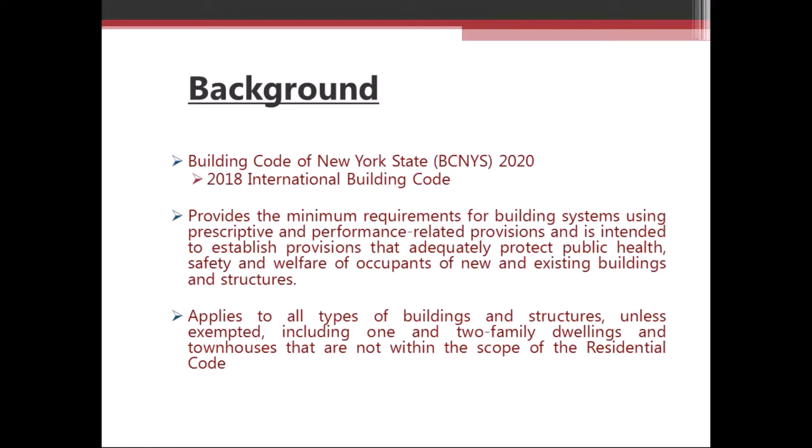So some of the exceptions to the building code, as I mentioned, are structures that fall within the residential code, and those are typically residential dwellings less than 3 stories in height. Agricultural buildings, consisting of barns, sheds, chicken houses, and other structures used solely for agricultural purposes. Temporary construction trailers, the trailers you would see on a typical construction site for the contractors and project managers.

Radio, television, communication, wind generation towers, and solar arrays. Although these structures are exempt, we do a lot of work on them. So the designer of these structures typically specifies certain tests and inspections to be performed for those structures. And then finally, children's camp sleeping quarters.

The documents that are required to be submitted with the building permit application include construction documents, typically the project plans and specs, statement of special inspections, the geotech report, as well as any other data submitted with the permit application. And in any event, the construction documents, the plans and specs, shall be prepared by the registered design professional.

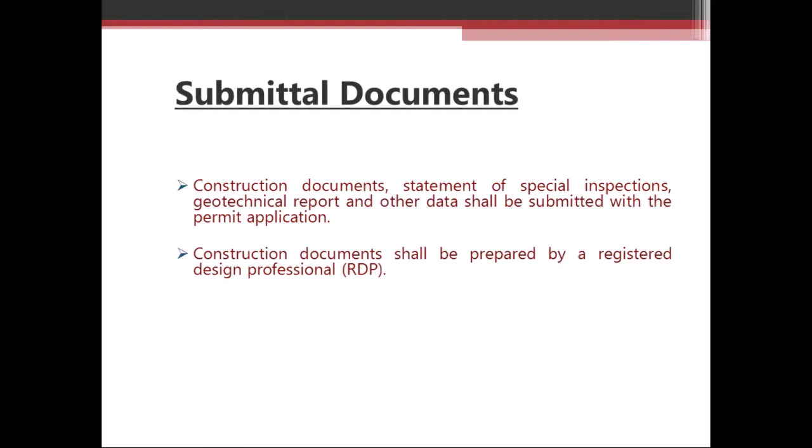So special inspections aren't anything new to the construction industry. Inspections were part of the first Uniform Building Code back in 1927. And in the early 60s, the term special inspection was introduced into the Uniform Code. But special inspection really came to the forefront in the early 80s after a walkway collapsed at a Hyatt in Kansas City, where 114 people lost their lives.

And after that collapse, a House subcommittee, chaired by Al Gore, investigated it, and recommended that comprehensive inspections should be performed for critical structural items during construction. So a special inspection is the monitoring of materials and workmanship of the contractor to ensure that the approved construction documents and codes are being followed.

Chapter 17 of the code is the pertinent chapter that has the procedures and criteria for inspections and testing. Chapter 17 also outlines the responsibilities of the owner, contractor, the design professionals, as well as the special inspectors. And the special inspection process is in addition to any structural observations, which will be required by the design professional.

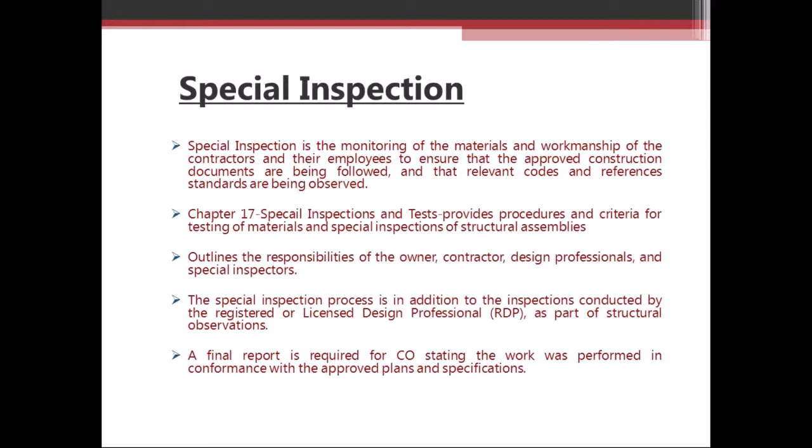And that brings us to question 1.

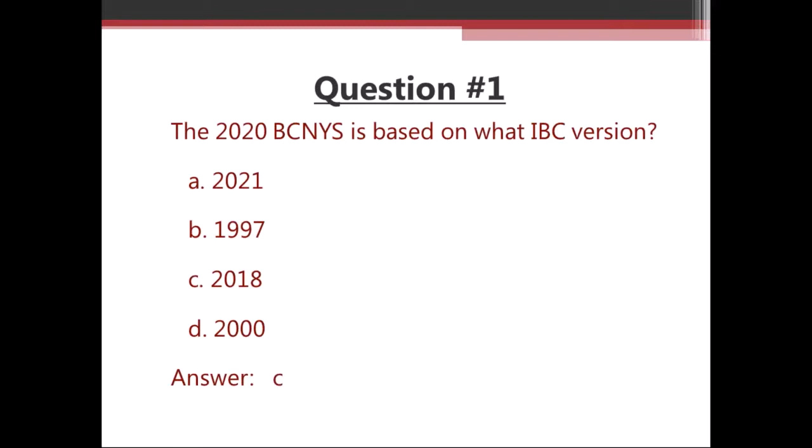So under approvals for Chapter 17, the agency should be approved by the building code official, and special inspections are conducted by an agency that is regularly engaged in conducting tests and providing inspection services.

So prior to construction, the approved agency needs to submit information to the building official that they are independent from the contractor, and they shall disclose any possible conflicts of interest to the codes enforcement official, as well as the design professional. They should also demonstrate they have adequate and calibrated equipment to perform the specified tests, and information or documentation that they have properly trained personnel to perform the inspections.

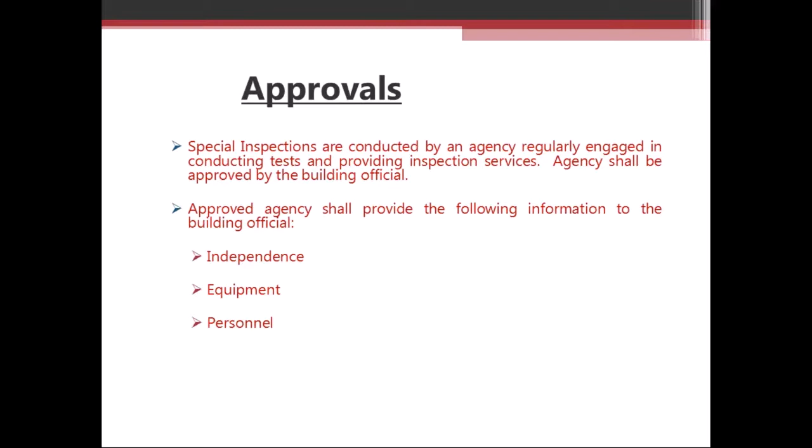Under reporting, the approved agency is going to keep records of the inspections and tests, which will indicate if the work was or was not performed in accordance with the approved construction documents. Any discrepancies need to be brought to the contractor's attention so they can correct it. This is probably one of the most important aspects of the reporting, to make sure discrepancies get fixed.

Before any future work covers up the discrepancy, so it can't be fixed or inspected later on. So it's always a good idea to have a pre-construction meeting to outline the process of reporting discrepancies, to make sure the inspectors have the right contact on the site for the contractor.

It's not the inspector's responsibility to accept or reject any work that's not in conformance. An example of this is concrete. If concrete's delivered to the site and it doesn't meet the specification for slump or air, the inspector needs to tell the contractor, and then the contractor needs to decide if they're going to reject the truck, try to fix that, or incorporate that deficiency into the work, and then hopefully try to get that discrepancy cleared up later on with the RDP.

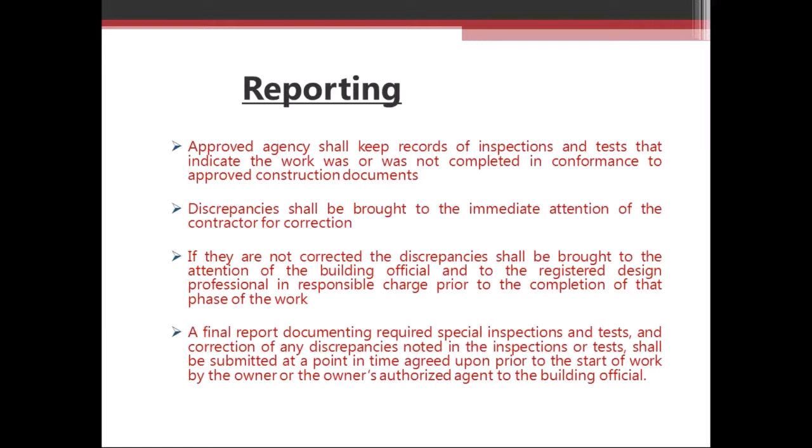If discrepancies aren't corrected, then they need to be brought to the attention of the building official, as well as the registered design professional. And the reports documenting the inspections and tests need to be submitted regularly to the owner or the authorized owner's agent, as well as the building official.

A statement of special inspections prepared by the RDP or a qualified person approved by the building official should be submitted with the permit application. That's going to list the materials, any of the systems, components, or work which is going to require testing and inspection. It's also going to list the type and extent of each test and inspection.

If the structure is designed to resist seismic and wind forces, any of those additional inspections, as well as the frequency of inspections.

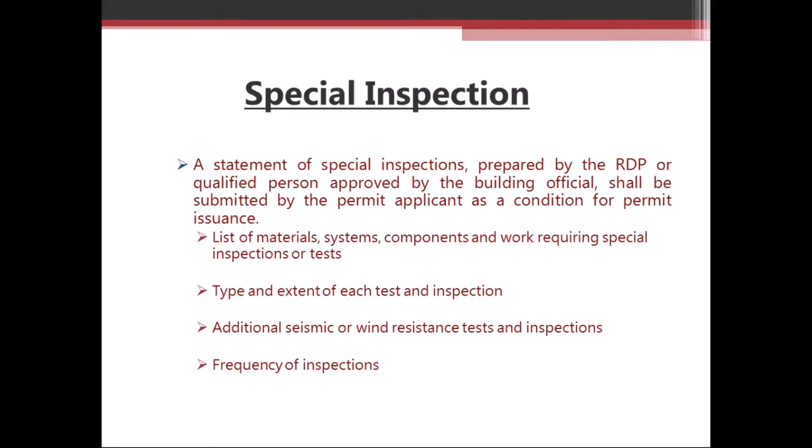The building code breaks down the frequencies into two categories. The first is continuous, where special inspection by the special inspector, who is present continuously when and where the work is being performed. An example of this would be if the contractor's backfilling a foundation wall that's 12 feet high, and specifications require the fill to be placed in 12-inch lifts and compacted to 95% all the way up. The inspector's pretty much got to be there full time to verify that the work is in compliance.

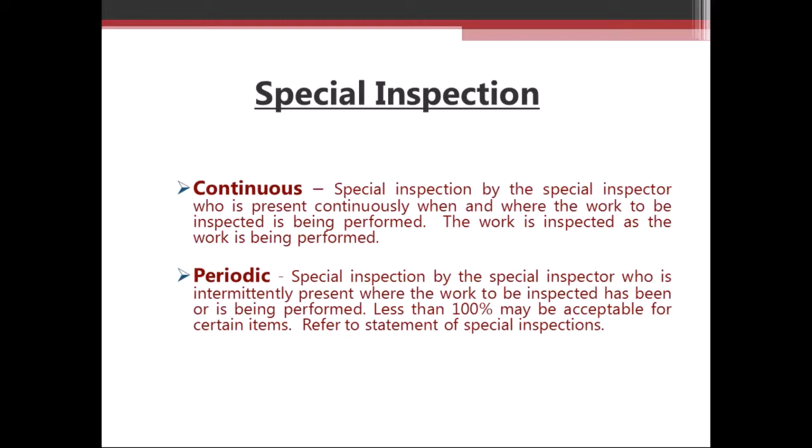Periodic inspection, that's special inspection by the inspector who is intermittently present where the work is being performed. In some cases, less than 100% may be acceptable. An example of this would be reinforcing steel in a long foundation wall. It may take the contractor a week to erect that reinforcing steel. However, the inspector can get there sometime just prior to concrete placement to verify whether or not it's in compliance. So the inspector doesn't need to be there full time when the contractor's erecting the reinforcing steel.

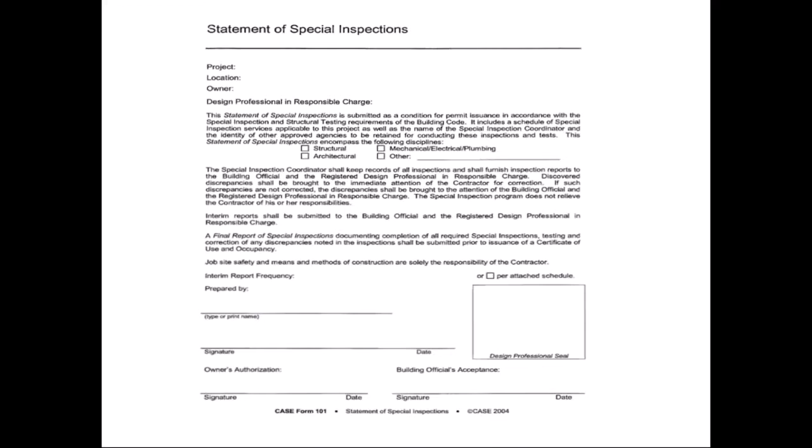So this is a CASE document, statement of special inspections. A lot of RDPs use this, and along with that, there's typically a schedule. So the RDP can just check off what items are going to require testing and inspection on a project, and it's going to list the inspection firm with their contact information. One thing I want to note at the bottom, it does state the inspectors and testing agencies shall be engaged by the owner. That way there's not a conflict of interest.

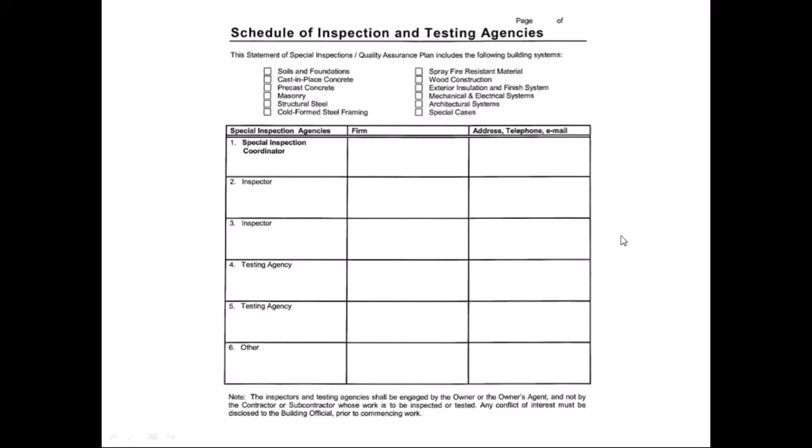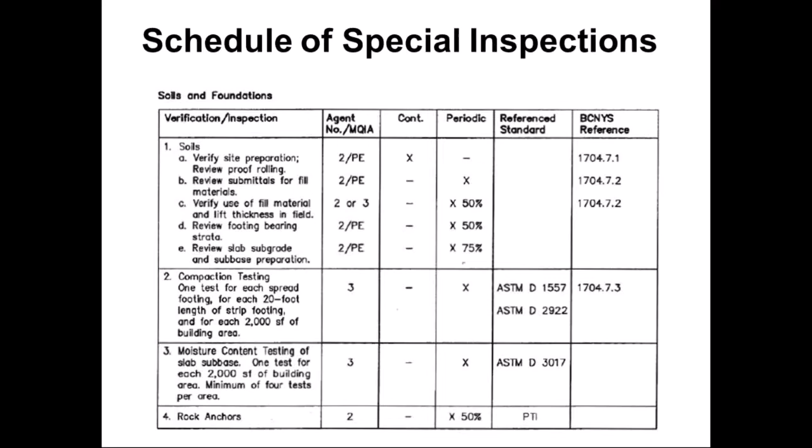And then number 3 is the testing agency. On some projects, the inspector and testing agency are the same firm, which in most cases should save the contractor or the owner money. They've also identified what inspection items are going to be continuous and which are going to be periodic, and identified the percentage level for periodic inspections. The other thing they do, which is kind of nice, is they put in what the reference standard is for the inspection items. And that brings us to question 2.

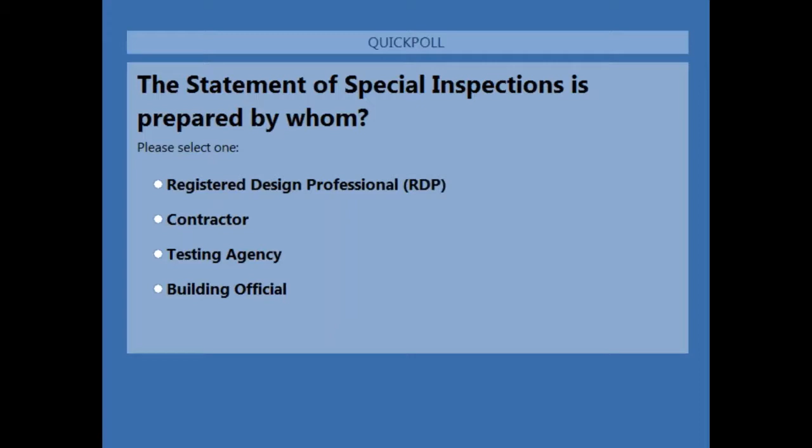Please continue, Brian. Okay, question 2. The statement of special inspections is prepared by who? Answer is A, the registered design professional.

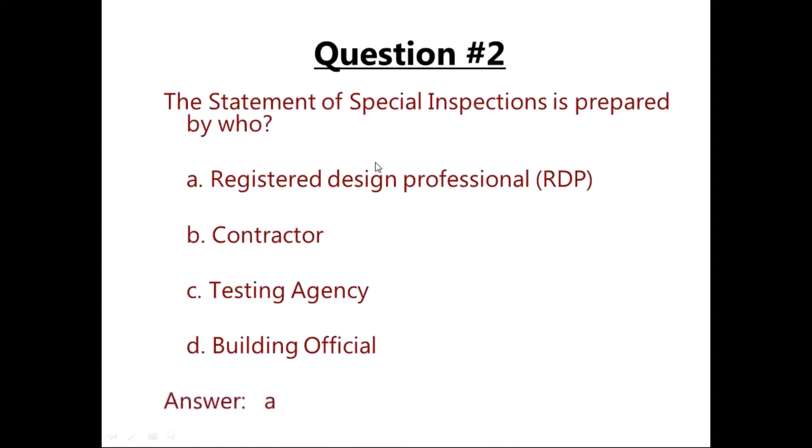Moving on to some of the special inspection and test exemptions or exceptions. One of the exceptions is any work that is minor in nature, as warranted and approved by the building official. Unfortunately, there is no definition for minor in nature, so that's really up to the building official.

One of the other exceptions is for Group U occupancies that are accessory to a residential occupancy, and for lightweight structures. One of the new things to the code, or at least the language, is the contractor is permitted to employ the approved agency, where the contractor is also the owner of the project.

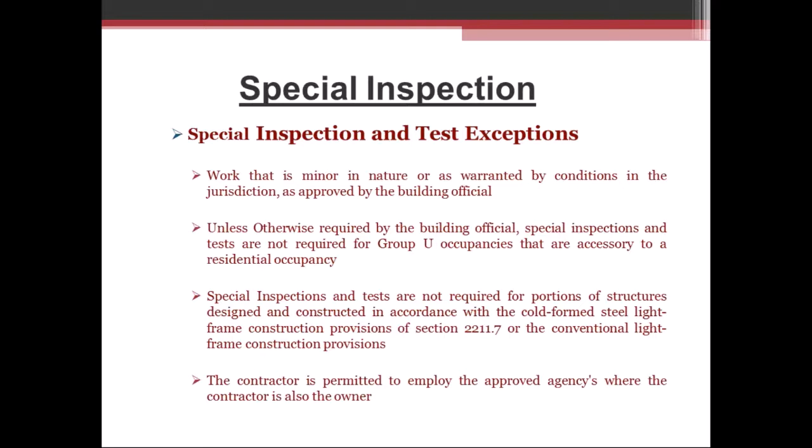So to get into some of the roles of the different parties involved with the special inspection process, the building code official has legal authority over the project and will issue a stop work order for any non-conformance items. They review the submitted plans and specs for compliance with the building code, and they approve the special inspection program as well as the agency and the inspectors.

They're going to monitor the special inspection activities during construction, review special inspection reports, and then perform a final inspection, which typically happens after the final special inspection report is issued. They can also require inspections for other work they feel may be necessary for the project.

The role of the special inspector: they verify that the work and materials used in construction conform with the construction documents, and notify the contractor of any non-conformance issues so those can be fixed or resolved with the RDP. Unfortunately, the special inspector can't issue stop work orders—only the building code official can do that.

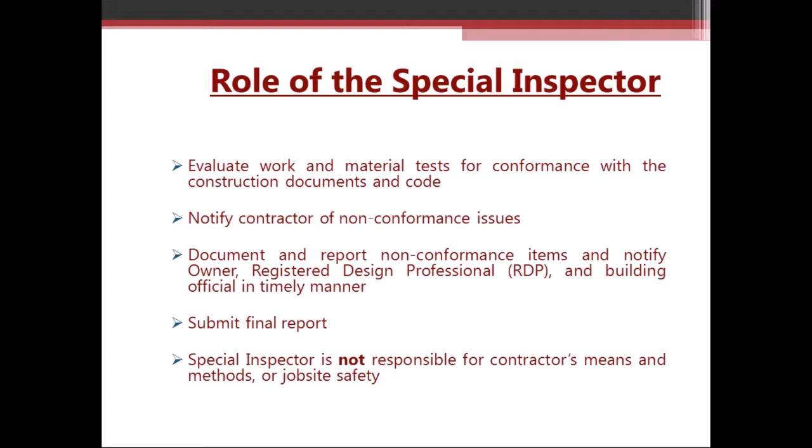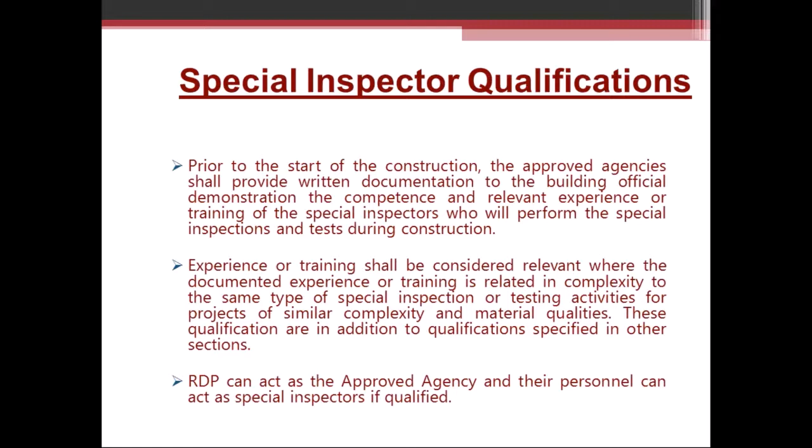Qualifications of the inspectors: prior to construction, the approved agency shall submit written documentation demonstrating the competence and experience of the inspectors who will be performing the tests and inspections. The RDP can act as the approved agency, and their personnel can act as a special inspector if they're qualified and experienced in the type of work they are inspecting.

The role of the owner: the owner is going to employ the approved agency as well as the special inspectors, so there's not a conflict of interest. They also maintain the statement and seek approval from the building official if there are any changes required as the project progresses.

The RDP prepares the special inspection program and determines what items are going to require special inspection. As the designer of the project, they are best suited to prepare the program, since they're the most familiar with the aspects of the project.

They're going to respond to any field discrepancies if they're contracted to do so. It's not uncommon to have a discrepancy where the contractor can't construct a portion of the work in accordance with the approved documents. In a case like that, it's marked as a discrepancy, and it's typically addressed between the RDP and the contractor to come up with a solution.

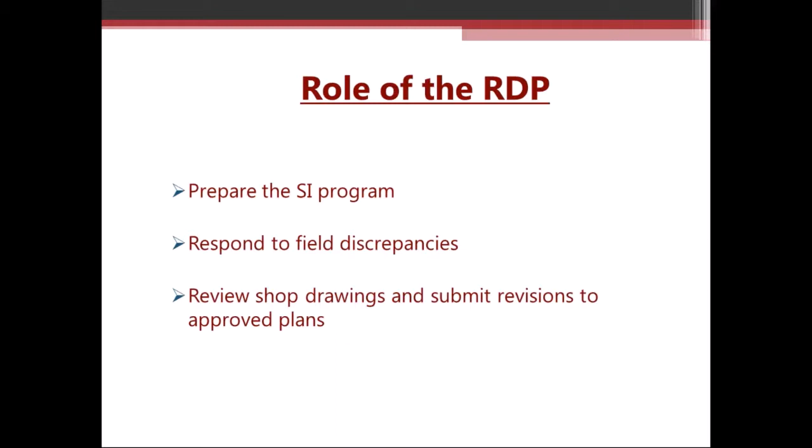The role of the contractor is to notify the special inspector that work is ready for inspection. It's important they provide sufficient notice so the inspection agency can coordinate their staff and equipment. The last thing we want to have happen is have the inspector out there at the time of concrete placement, because if there are any discrepancies with the formwork or the rebar, that's going to put the concrete placement off.

They should provide access to the approved construction documents in cases where any changes have been made to the specifications or drawings. We have had instances where inspectors identified discrepancies, brought that to the contractor, and then found out later there was a change to the drawing that didn't get down to the inspection agency.

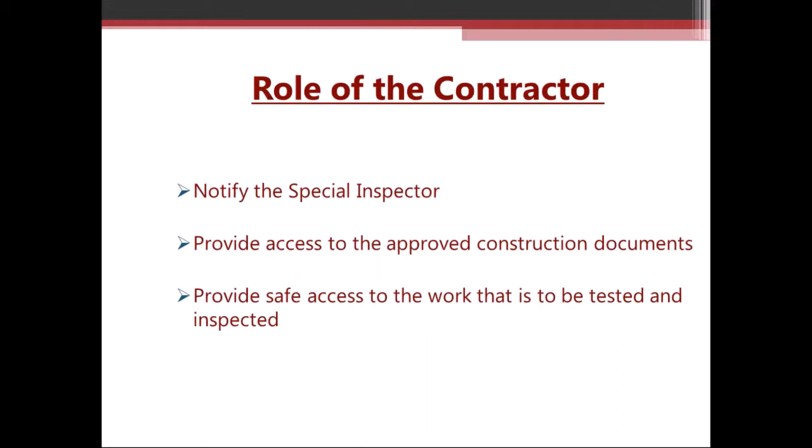And then lastly, they need to provide safe access to the work that is being tested and inspected. So they may have to provide lifts or shoring for subsurface work to be inspected.

So some of the special inspection items in the code, we're going to go through these in more detail, but soils, which applies to shallow foundations and fill materials. Deep foundations, which can be driven, cast in place, helical piles. Concrete construction, masonry construction, structural steel, sprayed fire resistant materials, and then mastic and intumescent fire coatings.

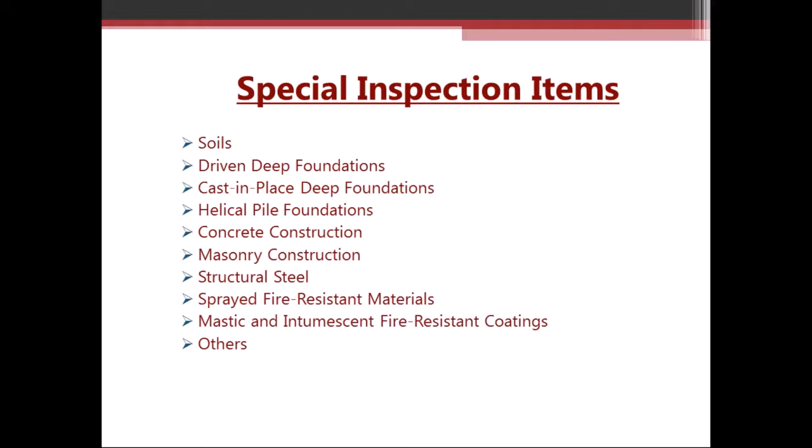There are other special inspection items identified in the code, such as wood and EIFS. However, this list is the typical items that we see on projects in our area. So for soils, the special inspector is going to determine general compliance with the approved soils report and documents prepared by the RDP during site preparation.

So prior to construction, a geotechnical report should be prepared that's specific to the soil and groundwater conditions at the project site. And from that, the structural and civil engineers will use that information to prepare their specs and drawings. And in a lot of cases, they will just specify on the drawings to prepare the site in accordance with the geotech report.

So the second item, the inspector is going to verify the shallow foundation subgrade is suitable to achieve the design bearing capacity, which is basically going to involve comparing the site observations at the time of the excavation work to the conditions that were identified in the geotechnical report to make sure they're consistent.

The inspector is going to verify excavations extend to the proper depth and material, which is typically going to be dictated by the frost depth. The frost depth in northern New York is typically 5 feet below grade, whereas in the southern part of New York, typically the foundations are placed 4 foot below grade for frost protection.

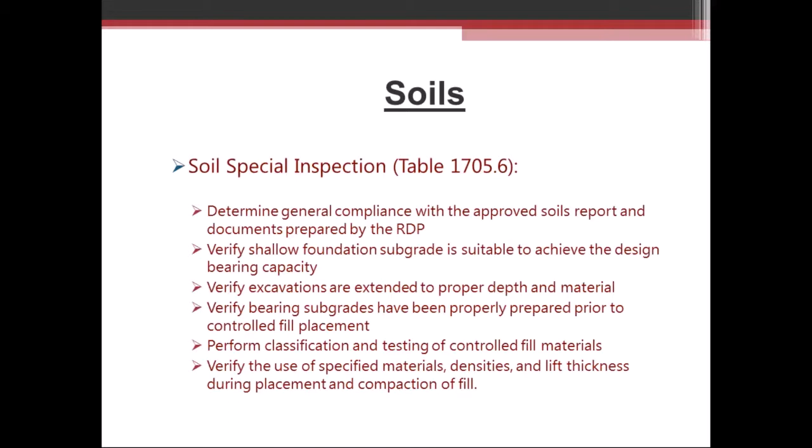So I'm just going to run through some examples here, some example photos. So the photo on the left, this is a foundation excavation, and I think this is in central New York. So the frost depth is 4.5 feet. So the contractor excavated to the proper depth, 4.5 feet. However, you can see in the photo there's standing water and mud.

And per pretty much all geotechnical reports and building codes, mud and standing water has zero bearing capacity. So this would be a discrepancy. So the inspector would review the project plans, specs, the geotech report, and typically there will be information in those documents on how to remediate this situation. If there isn't information in there, then typically the inspector will go back to the registered design professional to get guidance on how to resolve this discrepancy.

So for a typical situation like this, it's usually specified that the contractor over-excavate maybe 6 inches or to stable material, and bring in compacted fill, as well as employ some dewatering measures to get rid of the standing water. The other thing is it's very hard to place rebar in mud. The rebar gets dragged through mud and that contaminates the rebar, and also for chair support to keep the rebar up in the right spot, it's difficult to hold the rebar position when you have standing water and mud.

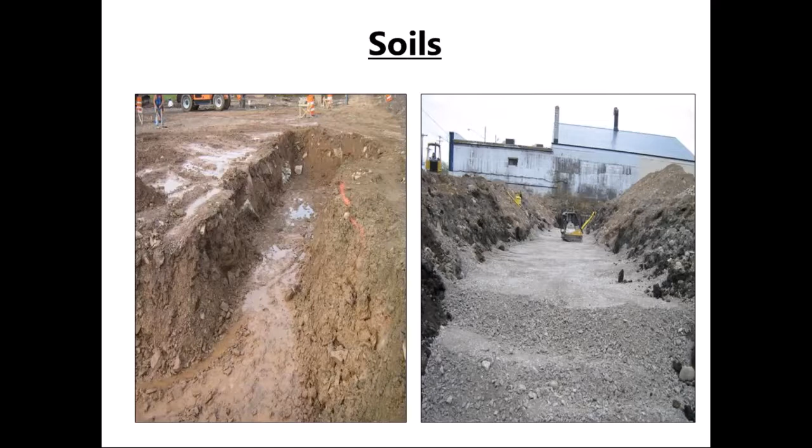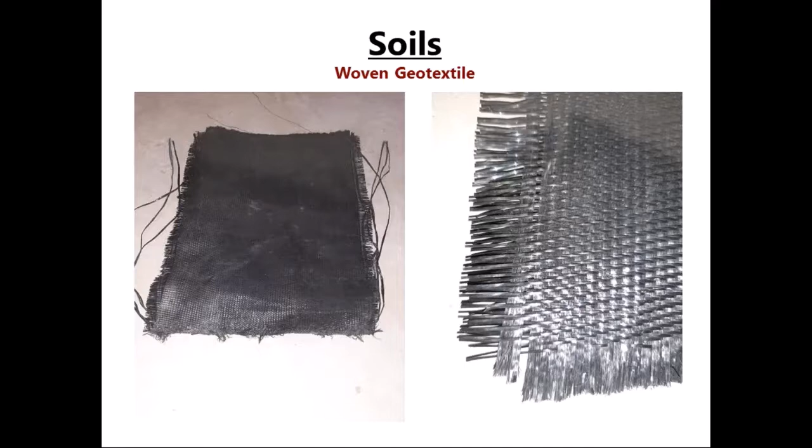Versus the non-woven geotextiles, these are needle punched polyester or polypropylene fibers. And these fabrics aren't as strong as the woven fabrics, but they do allow water to pass through them. So they're typically used for separation and for drainage applications, such as used for a foundation drain around a footing.

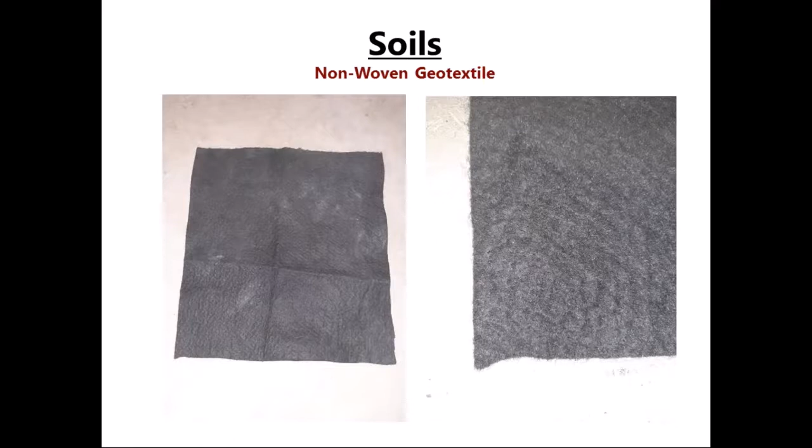There's sometimes confusion between the New York State DOT number 2 stone and the DOT type 2 subbase materials. So I've got a couple of photos here. The photo on the left, this is a DOT number 2 stone, and you can see it's an open graded stone. It's very, very good for drainage. It's typically used for drainage purposes. It's also used as a concrete aggregate for concrete mixtures.

But one of the things with this is in the field, because it is such a coarse material, it's not possible to do the typical field compaction testing on this material to verify it's compact. But because it is open graded, typically the specification is to compact it 4 to 6 times with a certain size compactor.

The photo on the right, this is a type 2 subbase, and this is a material you typically see below a slab or below a pavement. And it's a well-graded processed material. And because of the fine content in it, it can be tested in the field for compaction in accordance with the typical project specifications.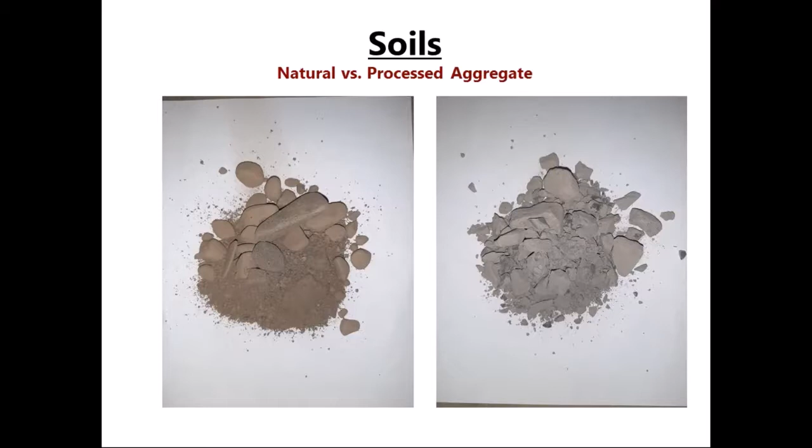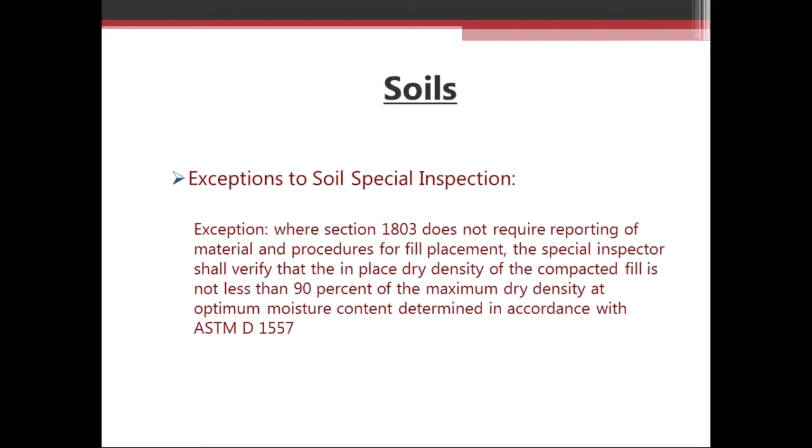There is one exception to a soil special inspection, and that is fill placement where there's no fill greater than 12 inches across the site. It doesn't need special inspection. However, it does require compaction to 90% of a modified Proctor in accordance with ASTM D1557. And that brings us to question 3.

Please continue, Brian. Okay, question 3. The special inspector can issue a stop work order on a project. True or false? Answer is B, false. The building code official is the one that issues stop work orders.

So moving on to driven deep foundations. These are typically going to be steel H piles, steel pipe piles, or timber piles that are driven with a large impact hammer to support structures over poor soil conditions. So in the field, the inspector is going to verify the pile material, the pile size and pile length.

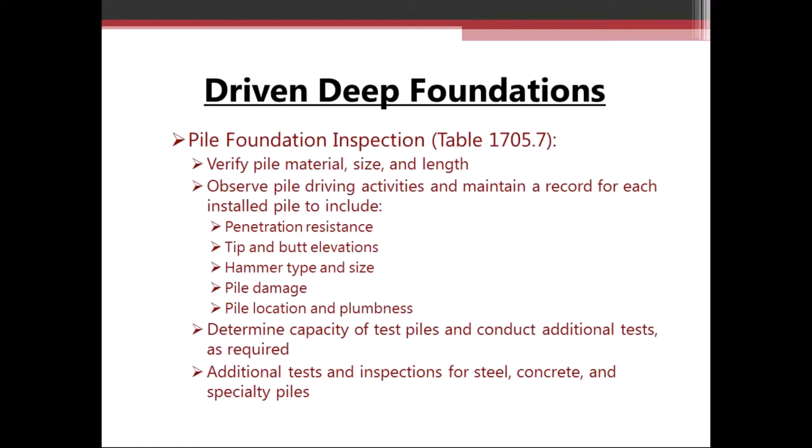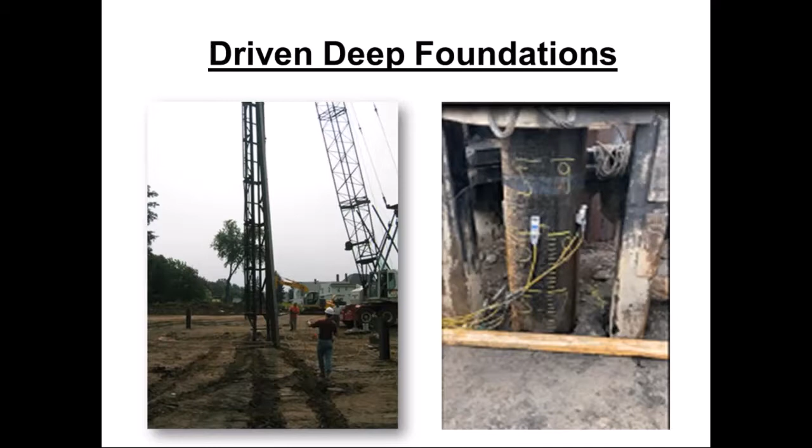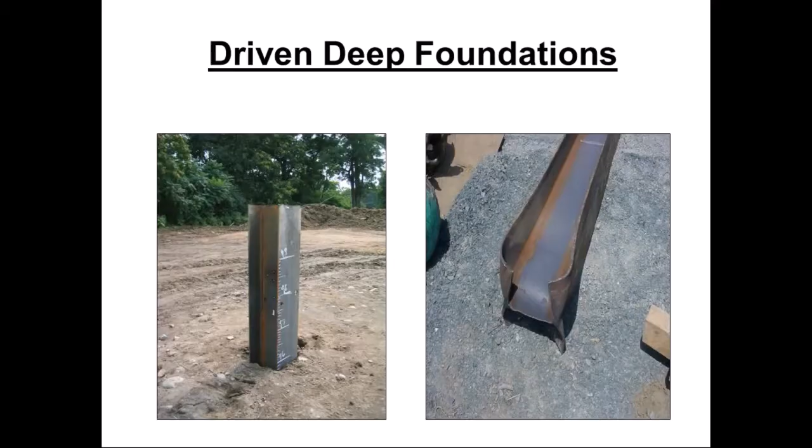Cast in place deep foundations. These typically consist of drilled concrete piers, micro piles, or auger cast piles. And with these, the inspector is going to monitor the drilling activities and maintain a record for each one. Verify the location, the plumbness, verify the diameter of the piles, the length.

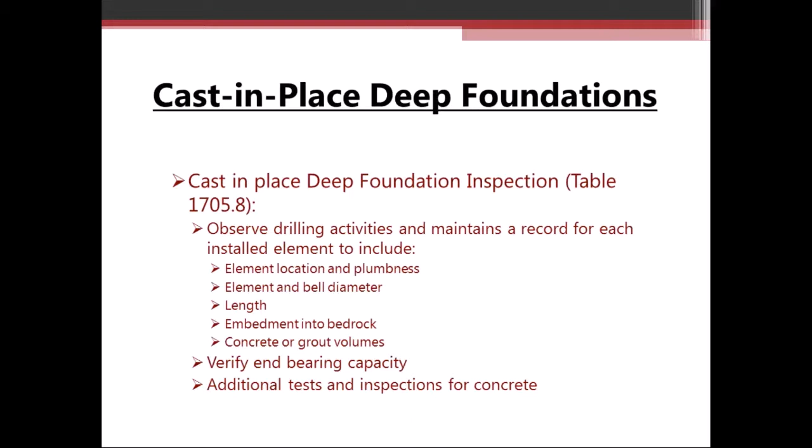Typically, especially with the drilled piers and the micro piles, they're going to be embedded into bedrock. So the inspector is going to verify that the design embedment into the bedrock is achieved through visual observation on site, as well as the information from boring logs contained in the geotechnical report. And then they're going to also monitor the concrete and grout volumes that go into those deep foundation elements. And then there is some additional testing as far as concrete or grout, whichever is used to cast the units.

So with the cast in place elements, there's typically an auger or some sort of casing and drill bit that will create a void down to a certain depth. And then that void is going to be filled with concrete or grout material. And then sometimes for the larger drilled piers, there may be some rebar cages that are placed that will require some reinforcing steel inspection.

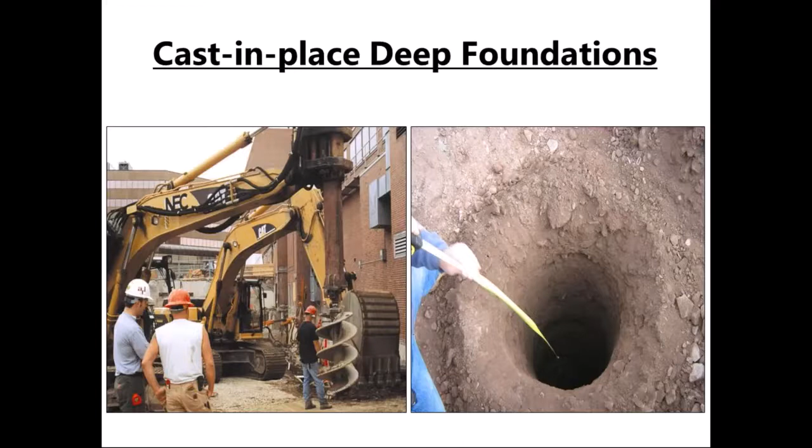Helical piles, these are small diameter, either square or round shaft piles, which have plates that are screwed into the soil to support structures through softer, poor soil conditions. So the inspector is going to monitor the installation activities, verify the installation equipment that's on site is specified and approved, monitor the pile dimensions, the top and bottom elevations, as well as the final installation torque. And with the helical piles, bearing capacity of the piles is related to the installation torque.

A couple ways the inspector can do that. There are torque gauges with the equipment that the inspector can visually look at, or sometimes there's shear bolts that shear off when a certain torque is met. So once those bolts shear off, then the inspector knows that they have the required torque and the required capacity. And then the typical additional testing would be if there's any grout that's being installed with these helical piles.

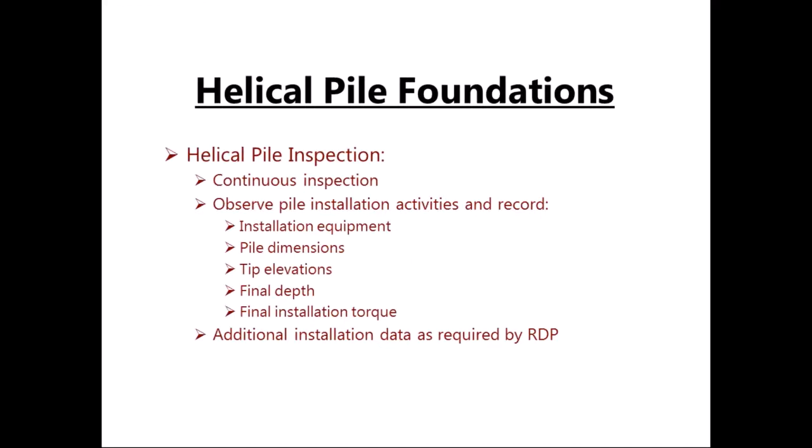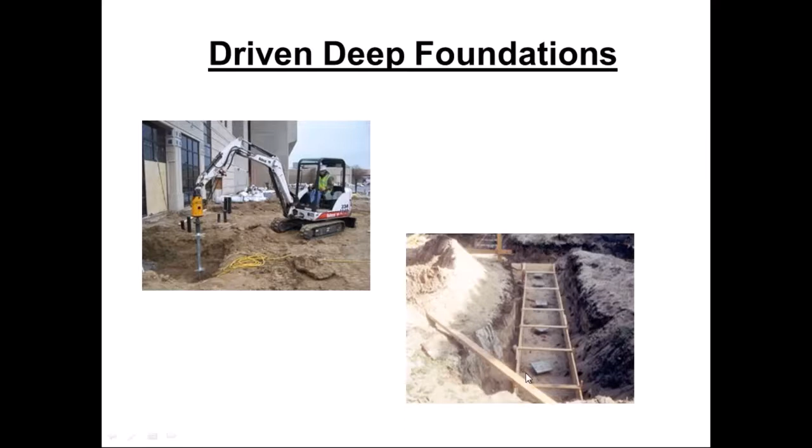Typically, these sections are going to be 3 to 7 feet in length. So it's easy just to keep adding sections on as they're being installed into the ground. And then here's some installed helical piles with plates on the top, which are going to be used to support a strip footing for a project. And that brings us to question 4.

Please continue, Brian. Okay, question 4.

The special inspector is hired by who to perform special inspections on a project? The answer is C, the owner.

So I've got about 10 minutes. I'm gonna have to get through some of these slides relatively quick, so I'll move on to concrete construction.

Prior to pouring concrete, the inspector is going to verify reinforcing steel placement and welding, making sure the reinforcing steel is the right size, spacing, clearance, and the installation of any anchor bolts, making sure they're the right grade, right size. Also the use of the required mix design. It's not uncommon on larger projects to have maybe 5, 6, 7 mix designs, so it's important the inspector be familiar with each one and what areas each mix can be utilized in.

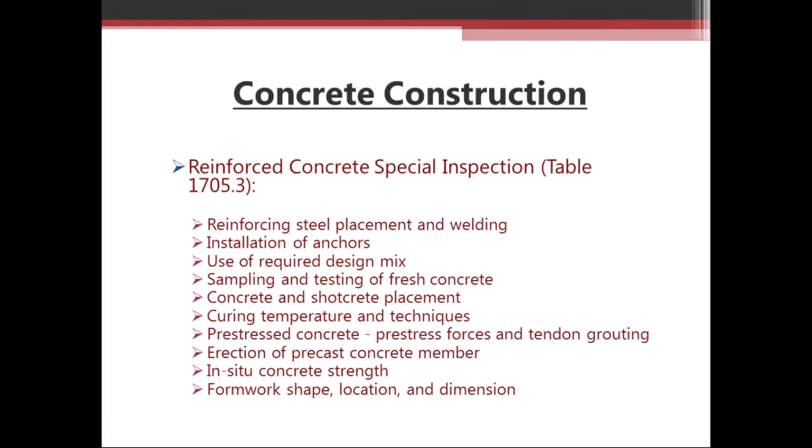Sampling and testing of the concrete for air, slump, temperature, and fabrication of test cylinders during the concrete placement. Curing temperatures and techniques for both cold and hot weather concreting, any pre-stressed concrete, precast concrete structures when those are erected, and in situ strength before the contractor can remove forms or shoring. Sometimes there's a minimum compressive strength that the concrete needs to meet before that can happen. And then finally, the formwork, shape, location, and dimension.

One of the things inspectors need to look at on site is the rebar, and all rebar has markings. The first marking on the rebar is going to be the plant that the rebar was fabricated in. That's good to know so that when the inspector is looking at a material submittal, they can match up that the submittal matches what rebar was being brought on site.

The second spot down is going to be the bar size, and there's a 13 here, which stands for 13 millimeter. This is a metric bar, so it's actually 1/2 inch in dimension, or it's a number 4 bar in English units. The third spot down is the steel type.

For this bar here, S designates billet steel, which is typically what you would see on a project site. If there's welding of steel going on, there might be a weldable steel, which would have a W for that spot. And then the fourth spot down is going to be the bar grade.

Since this is a metric bar, the number 4 represents 420 megapascal, which is 60 KSI in English units. This sometimes trips inspectors up because they think that 4 there is grade 40, but if this was an English number 4 bar, that 4 would not be there. There would be a separate smaller rib here, which would designate grade 60 steel.

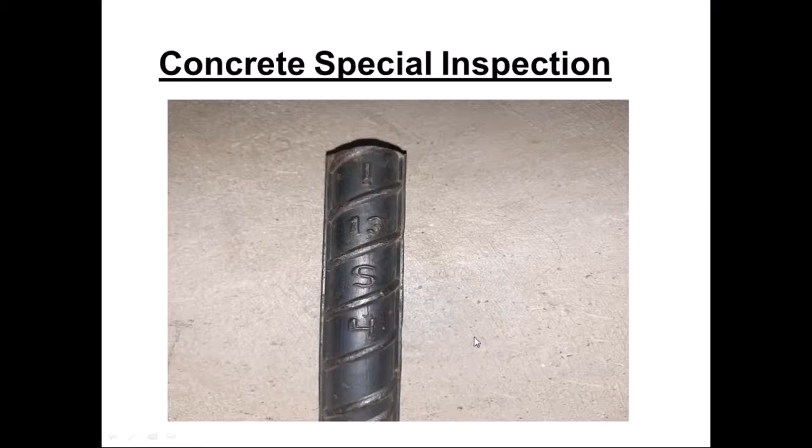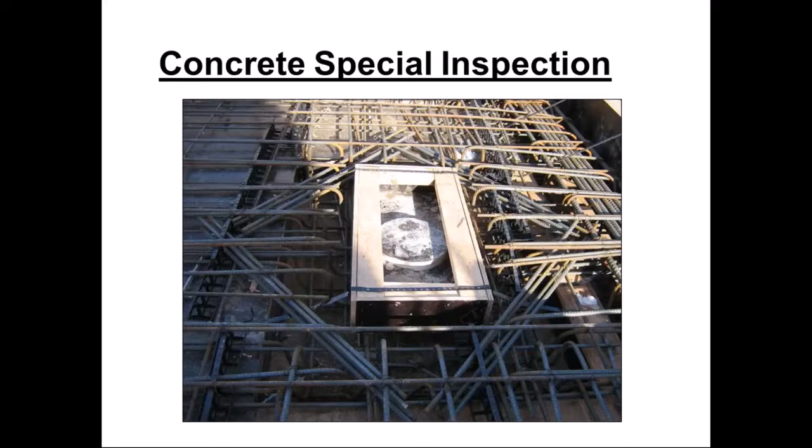This kind of shows how busy things can get in the field. On paper, this looks good with nice straight lines, but in the field there's a lot going on. So again, it's important that the inspector takes a look at this with as much time in advance to concrete placement as possible, because if the inspector found an issue down at the bottom part of the steel, it'd be very hard to fix within a short time. And there are tolerances, so the inspector will have to evaluate if all this reinforcing steel is within the appropriate tolerances.

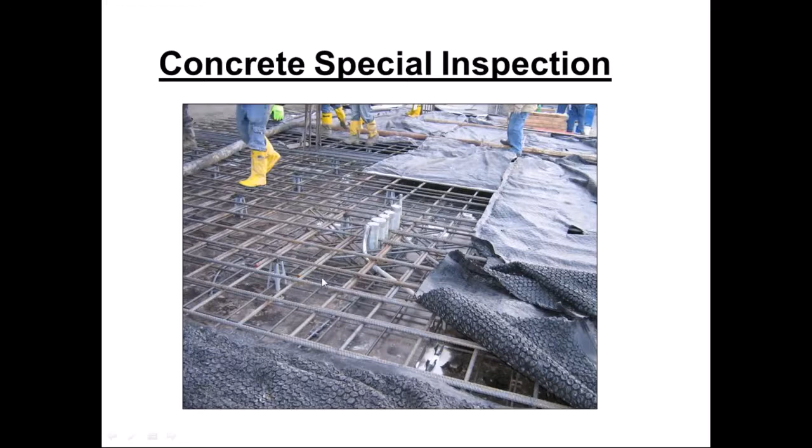This is a project that was done during the winter time, and part of the specification was the contractor had to submit a cold weather plan to cover the area being poured. This is a deck, so underneath they actually heated the deck, and part of the plan was they had to maintain a certain temperature. The rebar had to be a certain temperature before they could pour. So those are all things the inspector had to look for.

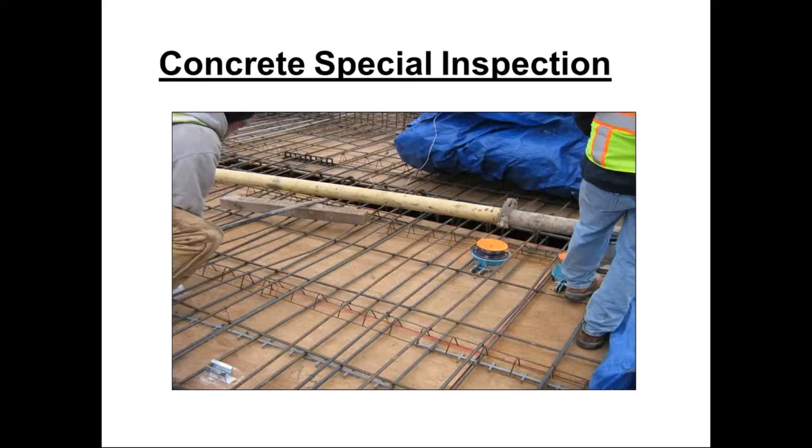The inspector looked at this the day before, and everything was in conformance, but the day of the pour, the contractor had to move the pipe around for the concrete placement, causing some of the rebar to be out of tolerance. Luckily the inspector was there that day and they were able to fix that before it was poured.

This is an example of the test cylinders that inspectors and testing agencies use to fabricate concrete test specimens. There are two types that can be specified: 6x12s or 4x8s. With the 4x8s, 3 need to be tested at 28 days to verify concrete strength.

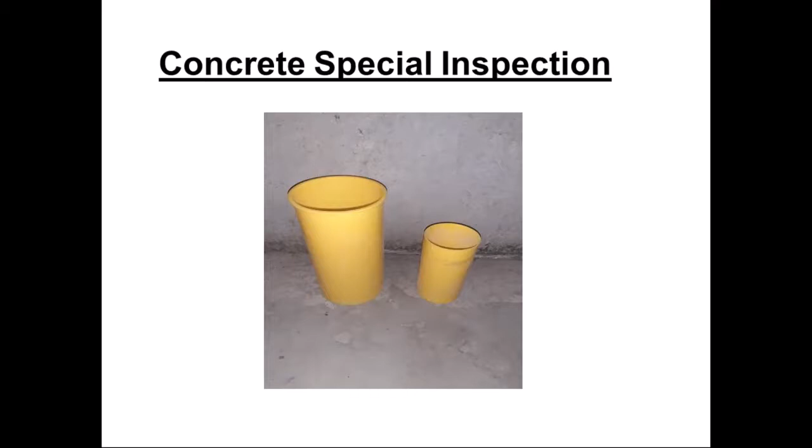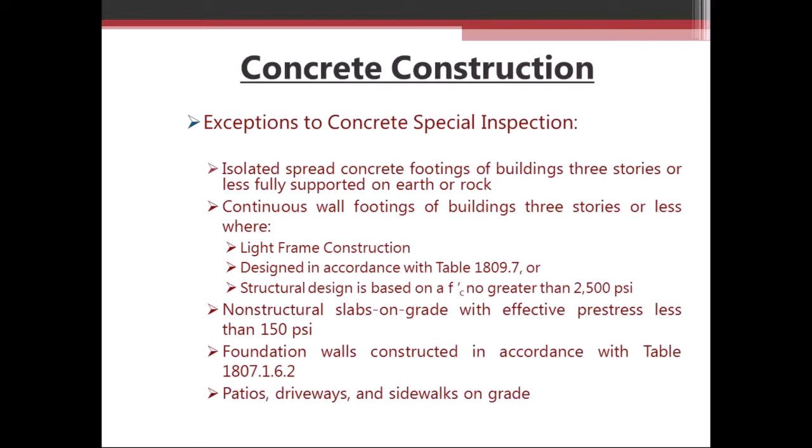Whereas with the 6x12s, only 2 are required to verify concrete strength. There are some exceptions to concrete special inspection, typically for lightweight structures, patios, driveways, and sidewalks. However, specifications usually require the concrete be tested for those areas.

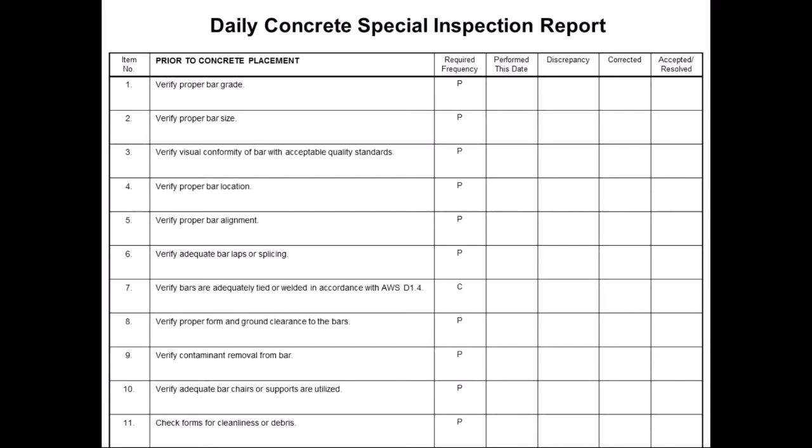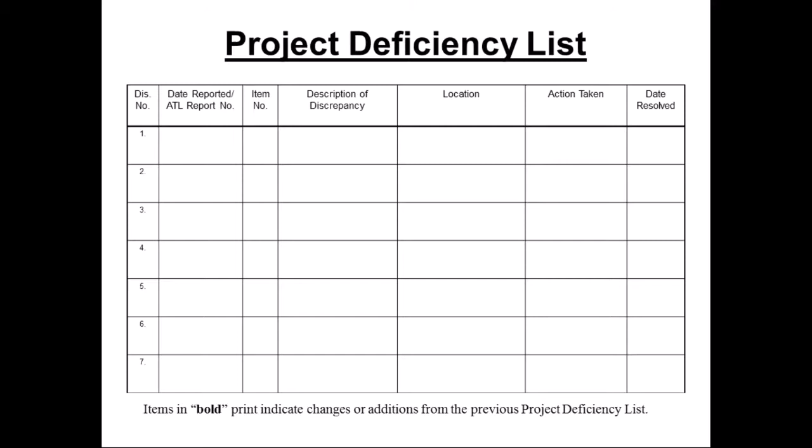Most agencies will have a checklist that their inspectors fill out, going through and checking off each item they looked at and whether or not it was in conformance. Again, most agencies will have a discrepancy list, so there's a running tally of what the discrepancies are and how they're resolved.

Masonry construction inspections are performed in accordance with the QA requirements of TMS 402 and TMS 602. These used to be published by ACI 530; however, since 2016, they've been published by the Masonry Society. They break down inspections into 3 levels, with level 1 being the least stringent, requiring only verification of compliance of submittals prior to construction.

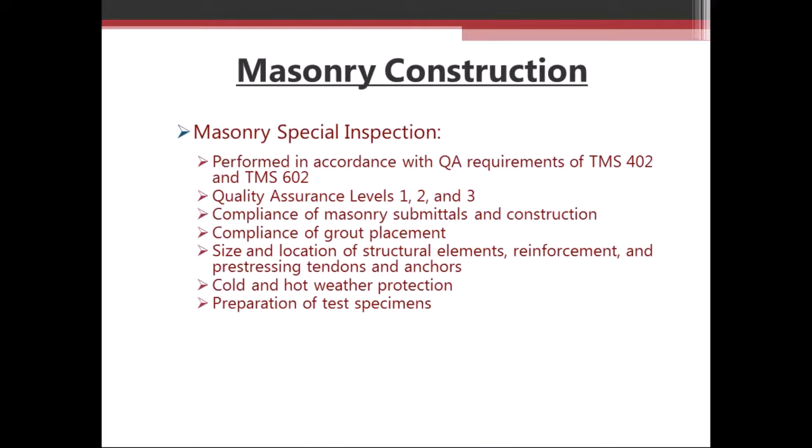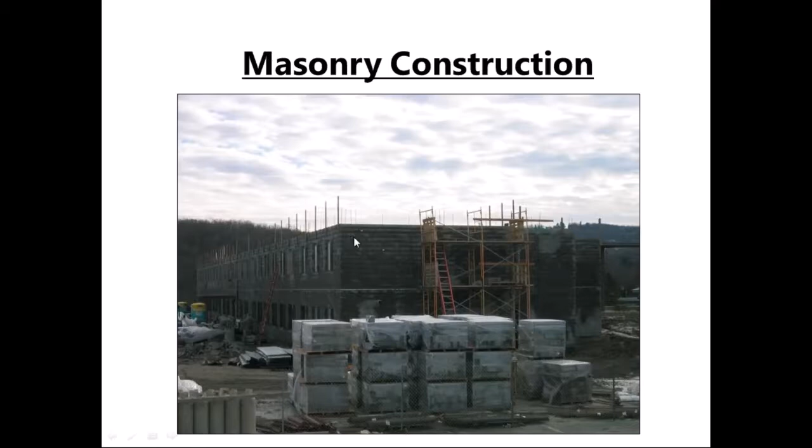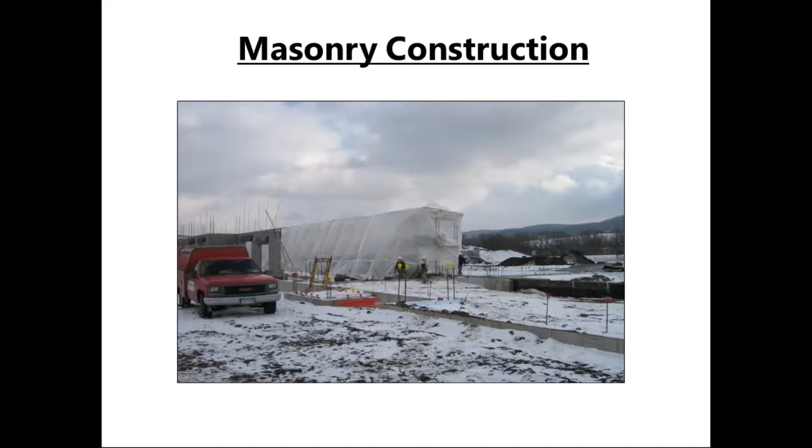Level 2 and 3 require field inspections and tests, with level 3 being the most stringent, with more inspection items and more continuous inspection instead of periodic. These are the items the inspector would typically verify in the field: that units are the right size, that rebar is in the right cell, and when the contractor grouts, that grout is placed in the right cell. For cold weather construction, they make sure procedures follow the contractor's cold weather plan.

There are a couple exceptions to masonry, again typically for non-load bearing structures.

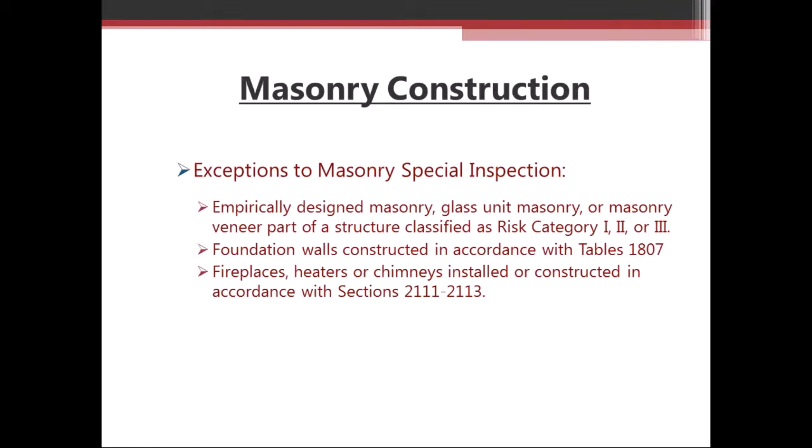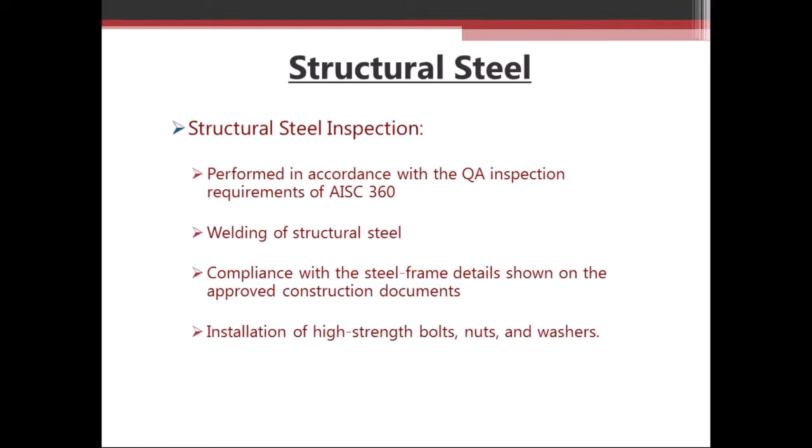Structural steel has seen a lot of changes in this area over the last few years. Inspections are performed in accordance with the QA inspection requirements of AISC 360, Chapter N, which covers welding of structural steel, steel framing, as well as high strength bolts, nuts, and washers. The frequency is no longer in the building code; however, the documents define them as observe, meaning random inspections, and perform, meaning each joint or steel member needs to be inspected.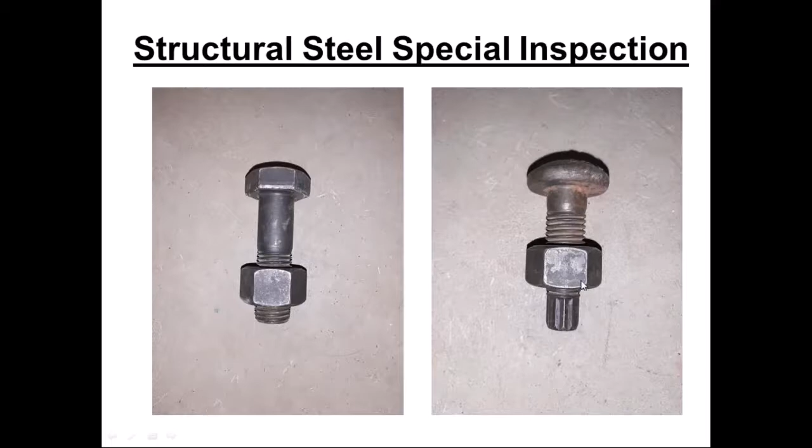For bolts, the inspector verifies that the right bolts are being installed, with a full nut. With TC bolts, these bolts are designed so that this spline snaps off when the bolt is torqued to a specified torque with a torque wrench. The contractor can go around and install all these, and the inspector can come in afterward and verify that all splines have snapped off. It's the same with tension indicator washers: these have paint, and when the bolt is taken up to a certain torque, the paint squeezes out. The inspector can go around and make sure that paint is observed around all those washers.

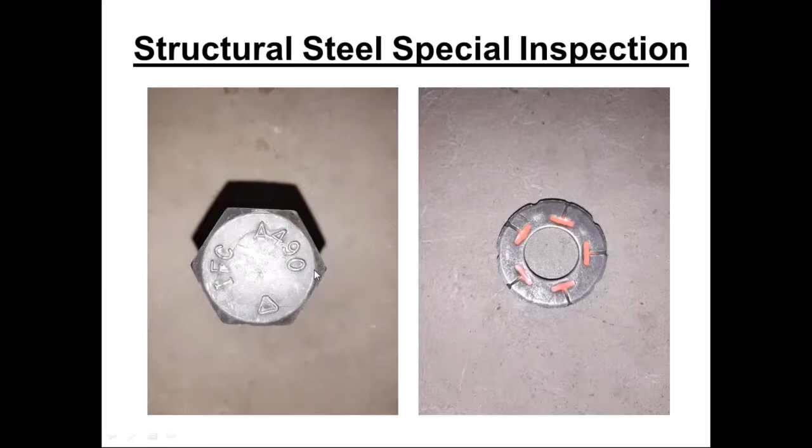Similar to rebar, bolts have markings on them which designate the steel grade, as well as where the bolt was fabricated.

And that brings us to question 5.

In the interest of time, I have two questions, and the first one's a short one: can design professionals perform special inspections? Yes, design professionals can perform special inspections, just as long as they're qualified and have experience with what they'll be inspecting.

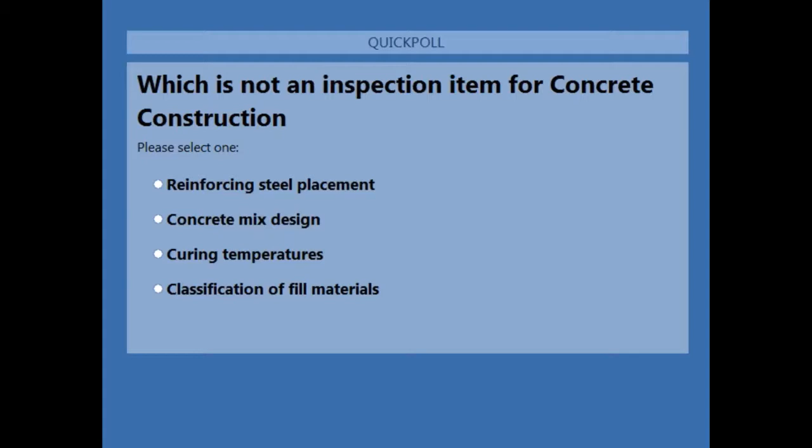Question 5: which is not an inspection item for concrete construction? The answer is D, classification of fill materials.

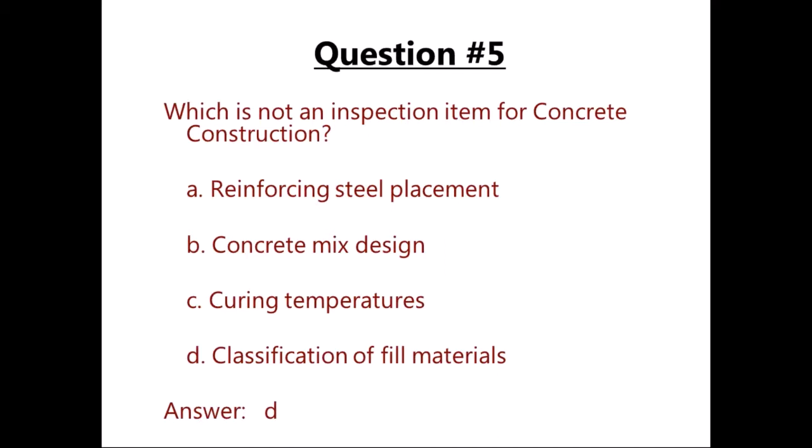Sprayed fire resistant materials: the inspector monitors temperatures before and after application. These materials are cementitious, so they need proper curing temperatures. The other big item is making sure the structural member does not have any moisture or surface rust on it, which would prevent the fireproofing from adhering to it.

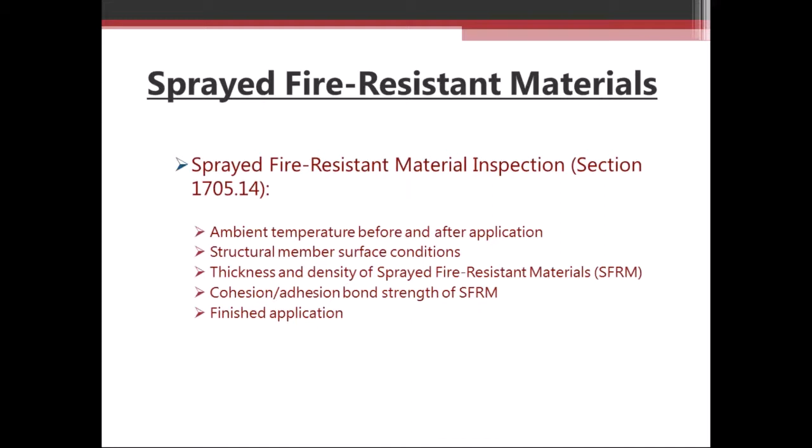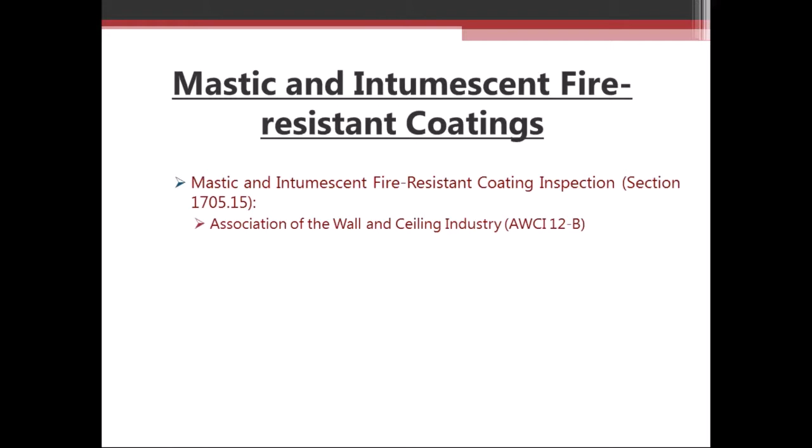For mastic and intumescent coatings, the inspection items are listed in the wall and ceiling industry document listed here. Similar to cementitious materials, temperature and humidity, as well as surface condition and thickness of the material, are all inspected with those coatings. And if there is fireproofing, there are no exceptions to the building code.